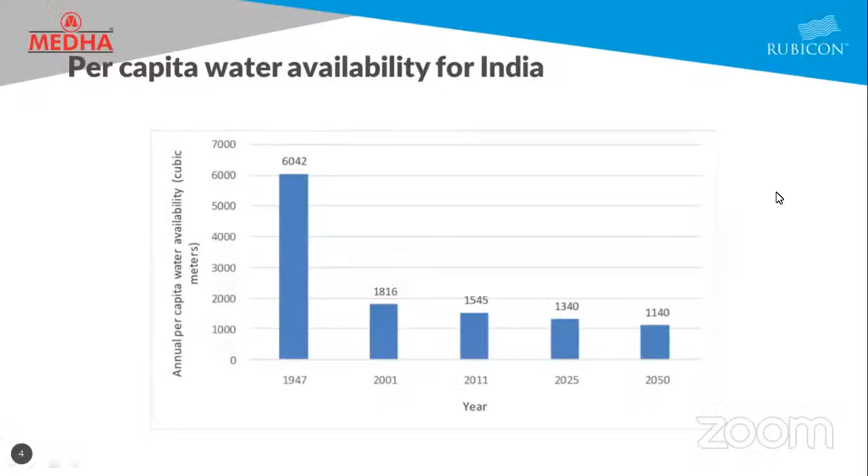By 2025, and at the same time, on the other side, the population is going up. Now, this is one of the major challenges.

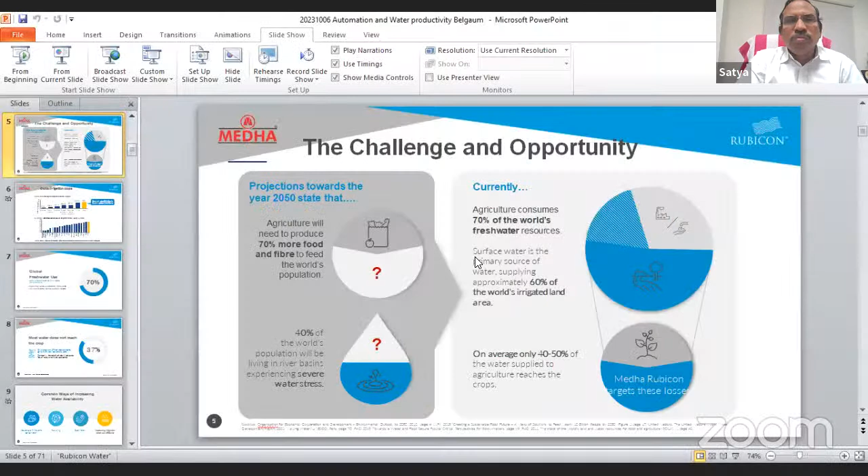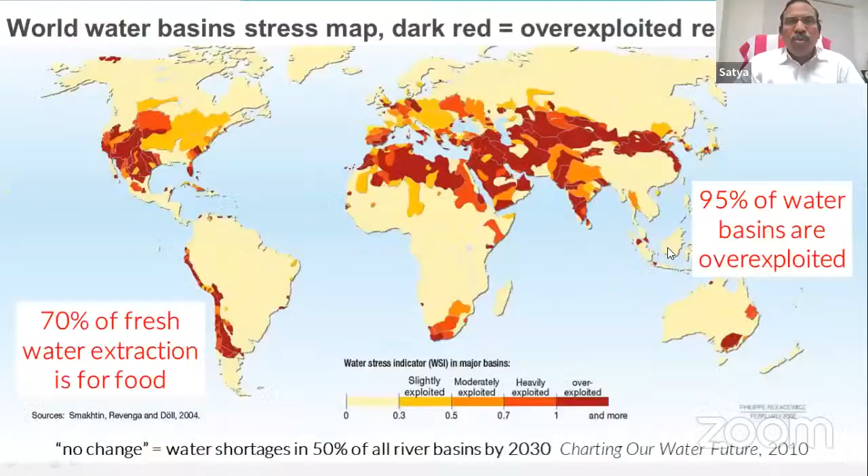Okay, now I got it. Are you able to see the screen? Yes, we are able to see it. Please continue. Yes, sir, please go ahead. Sorry, I hope you have seen the screen earlier. Yeah, this was over, you can move to the next slide. Yeah, further, yeah, this is it. Okay, fine.

Now, what I was explaining is that demand for food grains is almost 70% more required by 2050. Whereas another problem we have is that 70% of the world's fresh water is going to be used for irrigation, agriculture.

Now, out of that 70%, only 40% is the actual utilization. So how do we improve the utilization of water? That water efficiency improvement is the major tool available with us, and we can focus on this to overcome the future demand. This is the only solution available at this point of time.

Medha Rubicon joint venture is mainly focusing on canal automation to improve this particular 40 to 50% efficiency for the water utilization sector.

Now, if you see this screen, India is the largest agriculture bed. It's almost 62 million hectares, I would say, of agriculture space available for our country.

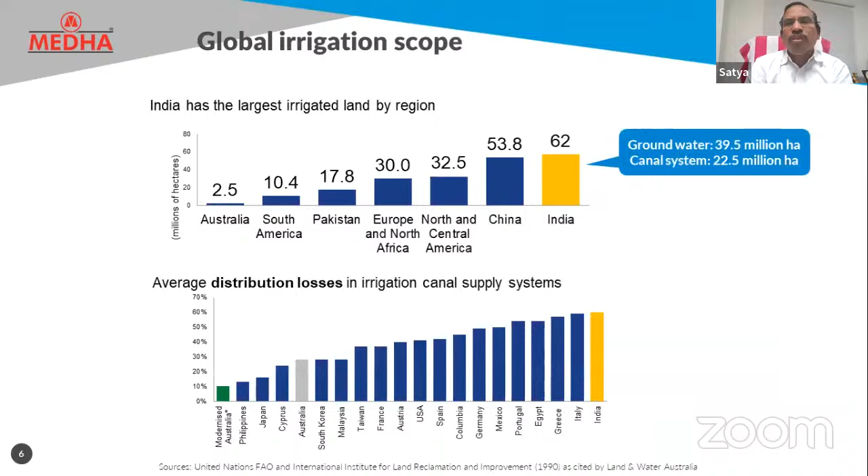Now, the fresh water, as I told you, 70% is going to be used for agriculture, and of that, only 37% water is used by real agriculture usage. The remaining 60+% is going to waste in today's environment of the irrigation sector, the agriculture sector.

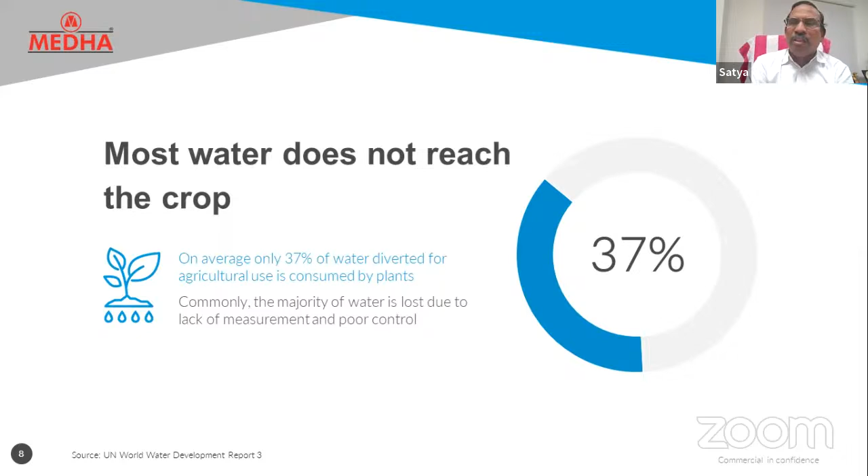Now, how do we improve this 37% to maybe 70%? Definitely, our agriculture sector will get a huge amount of water, which will directly increase sustainability, increase profitability, and solve all our future problems.

Now, for increasing water availability, there is only one improvement we can do in the last circle, that is improving the irrigation water use efficiency. That is the one we have in our hand today.

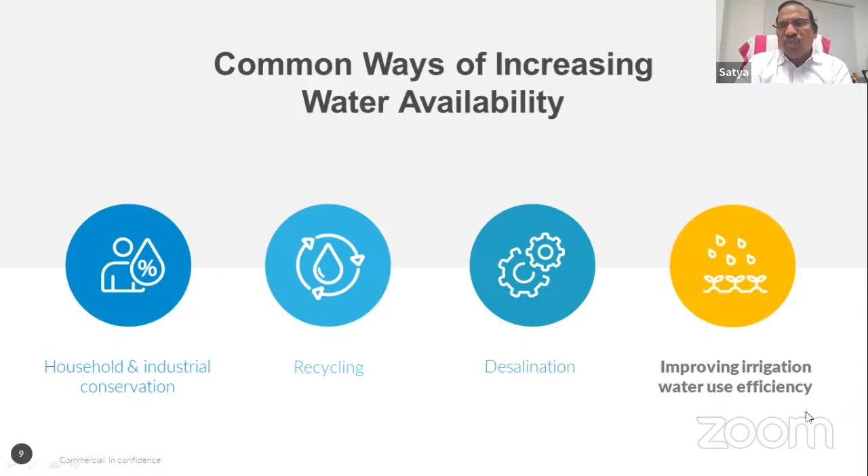The remaining options like desalination, recycling, and household/industrial conservation, are not as effective. But if you increase the efficiency, there will definitely be good effectiveness increase.

Then, if you look at the real losses, one is the leakages from the canal, seepages, unauthorized use, measurement error, leakages around farm outlets, and evaporation.

Evaporation is not in our control, leakages are well in our control, seepages can be in our control, and proper distribution is also one of the major objectives where we can improve water distribution efficiency much better than the present scenario.

We have already done this experiment in India, and we have shown very good results. That should definitely go nationwide now to improve the efficiency of water utilization.

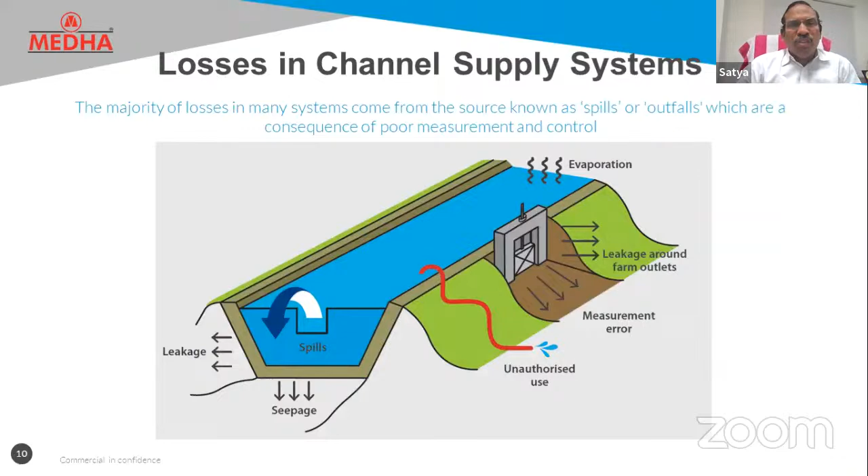Now, I'm talking mainly about canal automation, what it is. In the present scenario, distribution management, water distribution from the dam to the tail end, goes from manual to automated, and automated to remote monitoring, remote operation, and autonomous.

Now the solution we have provided today is autonomous control. No need for any manual intervention. Straight away, autonomous control can be implemented with our solution.

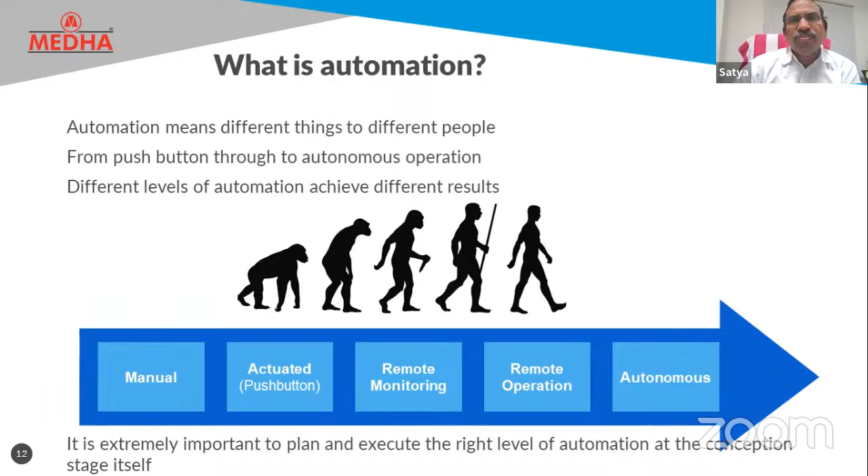Now these are all the different levels of autonomous control, from level 1 to level 5. If level 5 is achieved, it's really a wonder from the canal automation point of view.

And this canal automation will definitely give you a lot of data, a lot of picture of the water distribution and consumption of each and every farmer, each and every outlet. Based on that, a lot of improvements can be made. The data will provide a lot of insight.

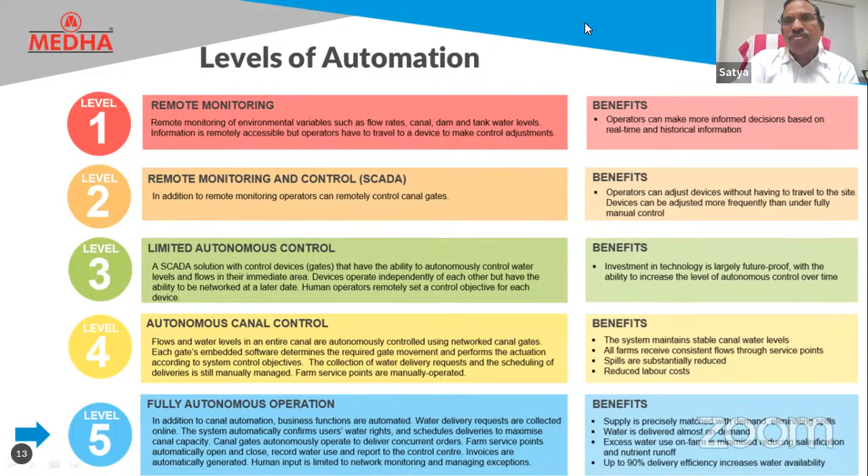The autonomous control should happen from the dam gate control to the farming land control. That means the DPO, whatever water is consumed from many outlets, the information will continuously pass on to each cross regulator in a real-time communication mode. Whatever amount of water is consumed at the tail end or the farming land, it will go to the next upstream level gate control.

In the upstream level also, the gate will automatically open to discharge that much water from upstream to downstream. That means the canal will always be maintained at the defined upstream level in the entire segment from the dam to the tail end.

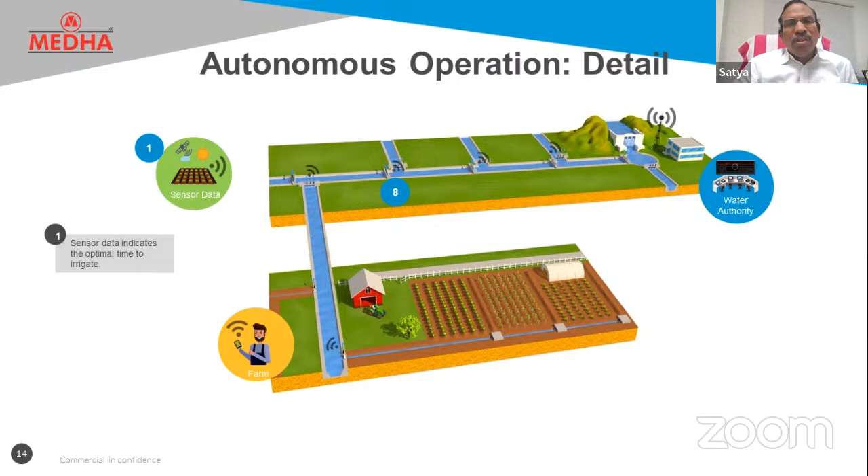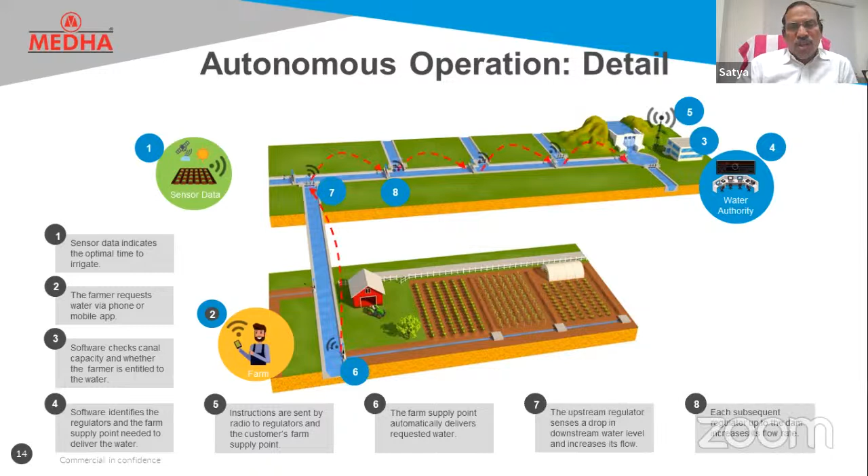That is the main advantage of the autonomous control, because all these controls work through a systematic communication network. There is a lot of computer software which handles this management and delivers the water from mainstream up to the farming point. Now that is the autonomous control.

Now, if you see this particular one, this is called a cross regulator or the outlet. These gates, like the upstream, you see one cross regulator, and this is one more branch outlet. Based on the control, both these gates will automatically, continuously, in communication mode, manage the water discharge in a systematic process.

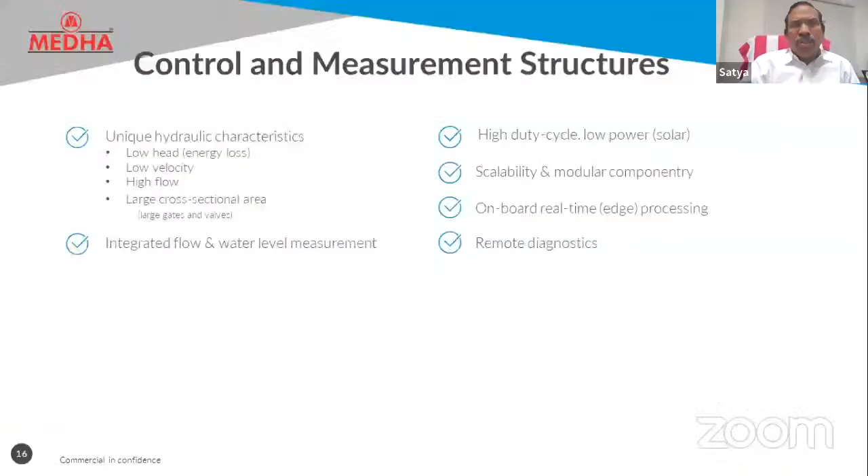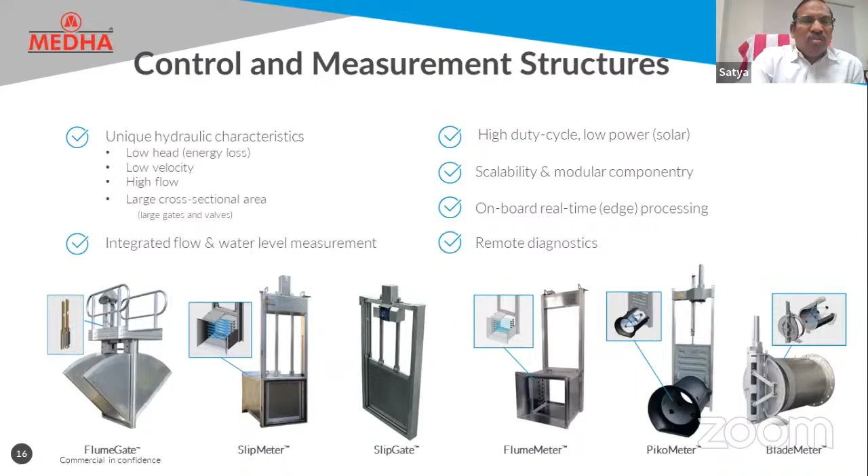Also, the flap, whatever you see on the black side, is like an aluminum alloy, almost the kind of material used for aircraft, which is lightweight. This operates up and down, and the entire mechanism of the motor is controlled with small power available from the solar panel and battery. The entire gate is operated with a 48-volt supply, generated from the solar panel.

Now, these are all the gates, and there is a special description on this. In the detailed presentation, I can explain each and every gate, the accuracy of the flow measurement, the accuracy of the level control, and the kind of materials used. But these are all gates integrated with the existing canal, whether lined or not. The gate mounting structure should be made properly to install these gates, and it will work.

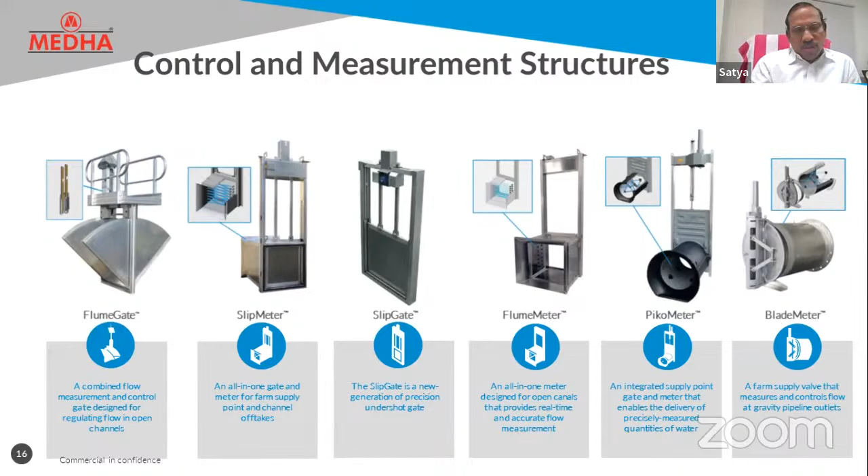Then the other one is the dedicated integrated communication infrastructure, because all these gates are going to be synchronized one after the other from the dam gate to the tail end gate. Now all these gates have to be in continuous communication. The communication network will be implemented as a dedicated network in the field area, because we are not going to depend on GSM or regular communication. This is RF communication, and we will not have any disturbance from other networks. This dedicated line is required, because if you don't know how the water is flowing, some places overflow, which is going to damage the canal and may flood sometimes. That's why this dedicated communication is required.

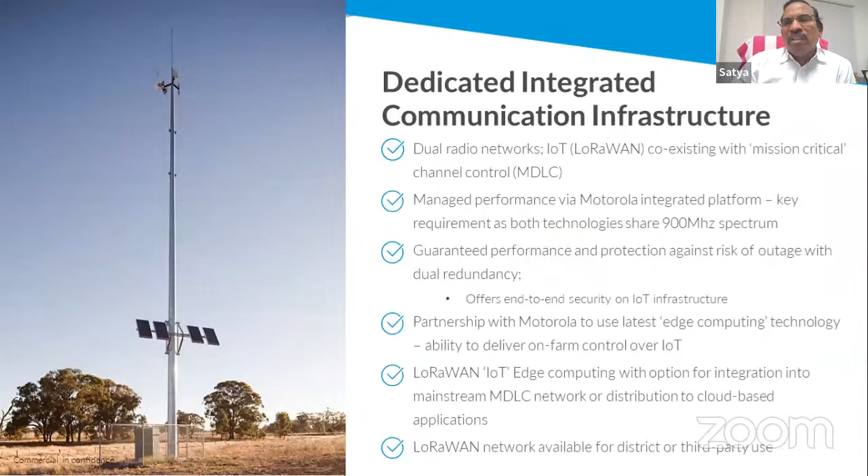This is the communication infrastructure. The communication tower also works with a solar panel. That means no place have we taken outside power. The entire system works with the solar panel.

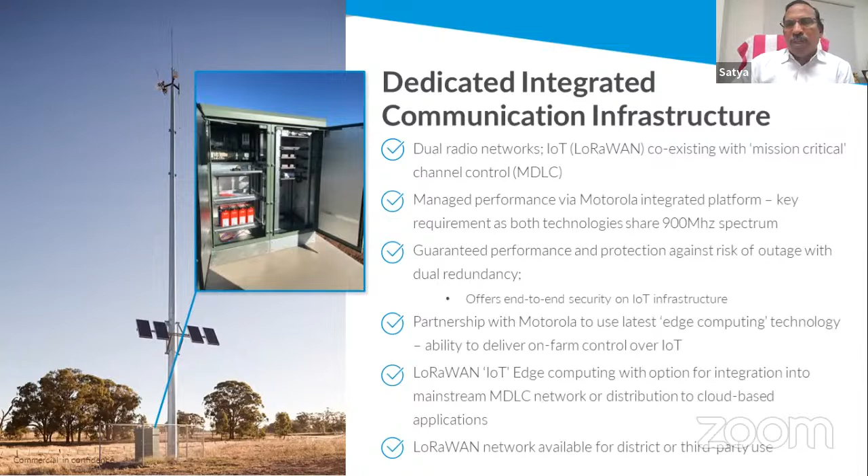Now, if you see here how the communication network will be: each outlet talks to the other. That is peer-to-peer communication, and at the same time point-to-multipoint communication, and point-to-point communication. This communication has been designed in such a way to meet the entire irrigation requirement.

It is established, one is in Kaleswaram and one is in Narayanpur left bank canal. In Narayanpur left bank canal, we have implemented almost 15 towers across the entire segment of 1,200 kilometers range.

Now, from the information point of view, irrigation management software is required. In this software, the irrigation schedule, advisory, and water order form a portal. That means in future, suppose a farm of 100 acres or someone wants water at a certain time and a certain amount in liters, they can feed that from the mobile phone to a server. Automatically, at the particular time the gate will get open and a particular amount of water will be discharged to the particular station. That level of integration is available in this entire network.

Then the network visualization, network topology modeling, distribution planning, and SCADA connect, remote connect. You can continuously see the data, what is happening, how the distribution is happening, and how automated delivery is happening. Everything you can visualize from this entire picture. That is called management software.

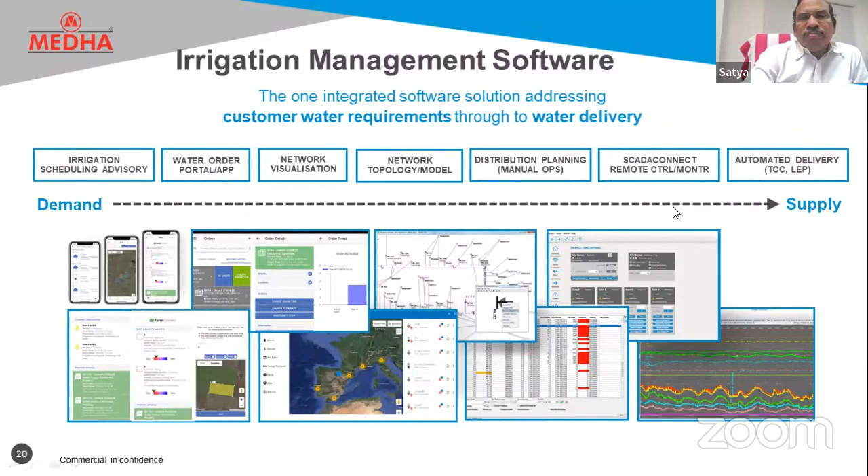Now, if you see this kind of display, you can see the entire picture of what is happening, how the water dynamics are changing, what time the water was delivered, how the levels are increasing, and this particular data shows the entire water dynamics. That means we can maintain the pool. CR to CR is one pool, and in between there are distributaries. How much amount of water goes from upstream CR to downstream CR, and how much has gone to the distributary, and how we can always maintain full supply level - that entire picture can be visualized, and you can program and use that.

This particular site is an Australia site and China. They have implemented this canal automation very extensively, and they have done an excellent job as far as water utilization is concerned.

Now, in addition to water rate distribution and other things, there is another unknown factor - rainfall. Suppose you maintain a water level at full supply level, and there is a sudden rainfall in that particular area - then what will happen? The water supply level will increase, full supply level will increase in the canal. During that time, based on the rainfall data and the rise in water level data, automatically the gate will get open and it will try to protect the canal, so it should not overflow or cause floods. Sometimes automatically the escape gate will be opened to maintain the FSL level always in the safe zone.

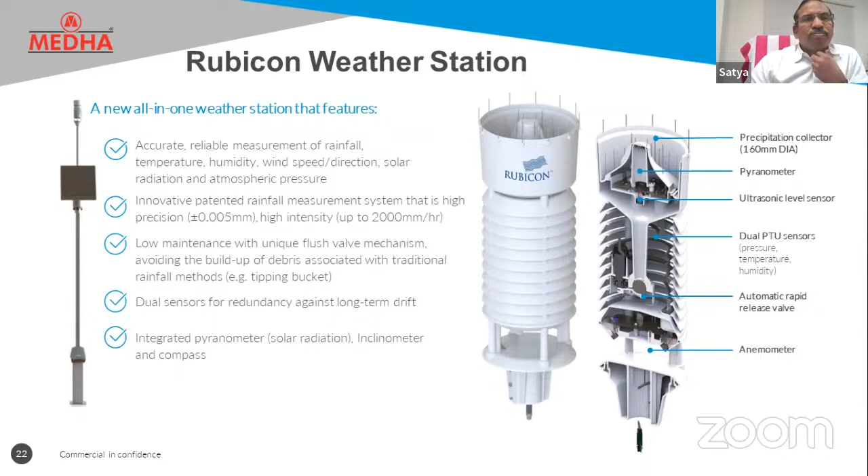Now, successful canal automation projects are done in India. We have done many projects there. I will tell you one by one.

This is the project in Karnataka, and I would say in 2019, I think we got the order from Karnataka for the Narayanpur left bank canal.

This Narayanpur left bank canal is almost like a 1,250 kilometer canal with 4 lakh hectares of agricultural land. They used to have a lot of problems earlier, and the water efficiency was almost like 30 to 35%. We have implemented this, and we showed results in 2022 — I think the first full season — and 2023 is going on.

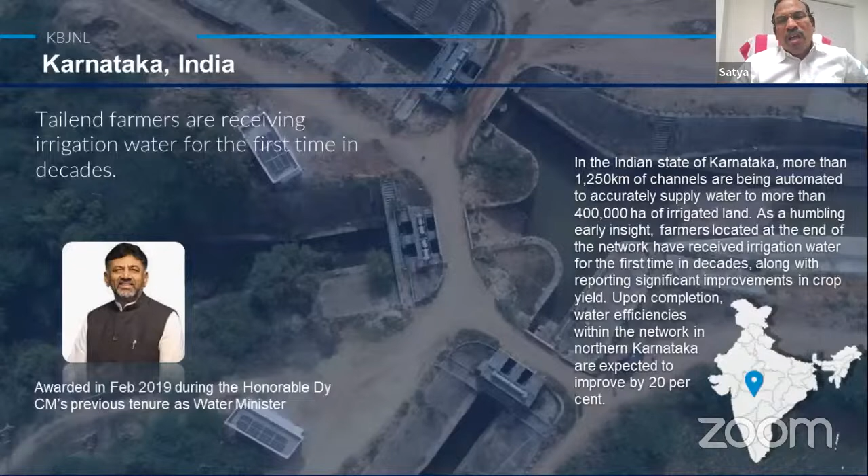In 2021 also we have done some level of project completion. Now, last year's data always shows a 20% improvement in water usage efficiency. The amount of water we used to take earlier from the dam, and the amount we are taking now — there's an improvement of 20% already demonstrated for the country with canal automation.

Now, in this particular canal automation, the main objectives are operational efficiency improvement and transparent water supply. Now today, I'll tell you about one of the recent things from the last one week, what we are doing.

There is a shortfall of water from the Narayanpur dam, and there is a lot of pressure from the farmers. Now, in the canal SCADA center, many MLAs and farmers are coming, and they are really seeing how much water is available, how much distribution is happening, how much we are able to deliver at each outlet — they are able to see the entire picture in my SCADA center in Narayanpur.

That means there is a lot of conflict between village to village and fighting between farmer to farmer — you are taking more water, I am taking less water, I am not getting water. All that information is clearly visible, and the Narayanpur people are able to manage the crisis situation because the water supply information is available, no problem.

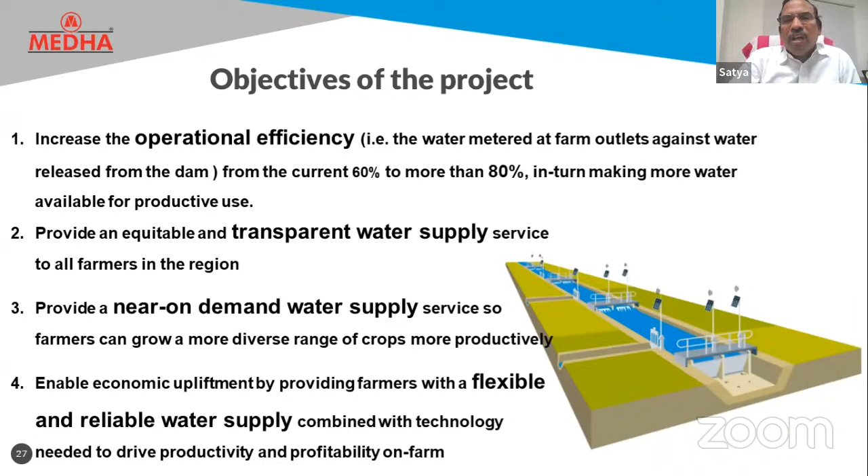If the water supply information is not available, then only the problems are going to start. The visualization picture is really giving a lot of insight to the people there.

We have created automated structures like some new cross regulators we have designed. We have done the hydraulic analysis of the entire canal, and identified some locations where we need to add some cross regulators, and those cross regulators have to be automated. Then only is it possible to get good efficiency.

Based on that, we have supplied almost 144 new gates, and we have constructed more than 45 new cross regulator sites, and we have improved the water availability efficiency.

All the old cross regulators — these are all radial gates. All these radial gates, which were not in operation earlier, we have refurbished and automated. We have not installed new gates.

That means all the automated radial gates have been refabricated — reconditioned — and we have installed automated motor and actuation mechanisms to improve the control of those existing old gates.

And we have installed micro weather stations — 60 weather stations — and 15 wireless radio towers in the entire network.

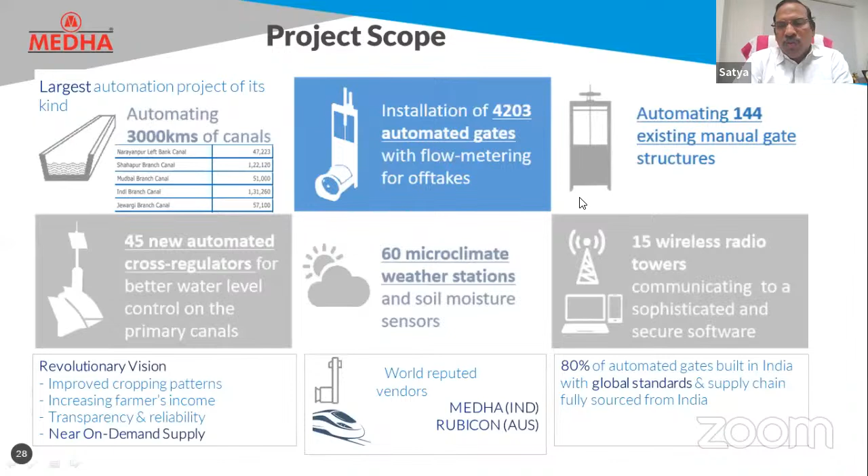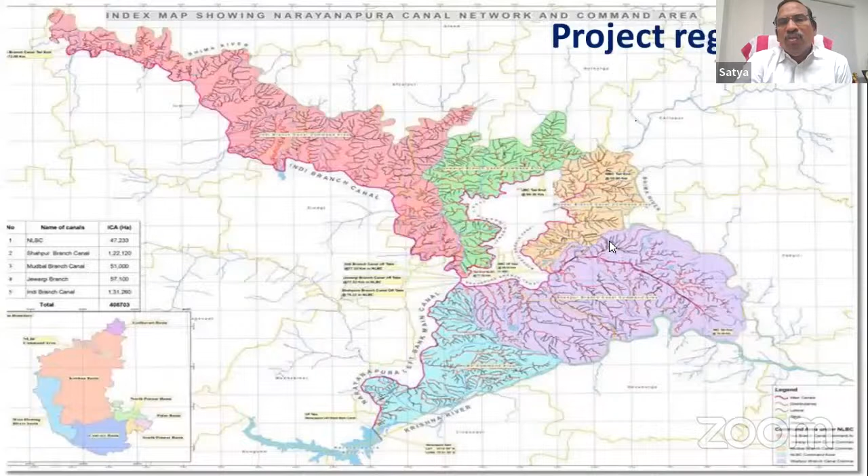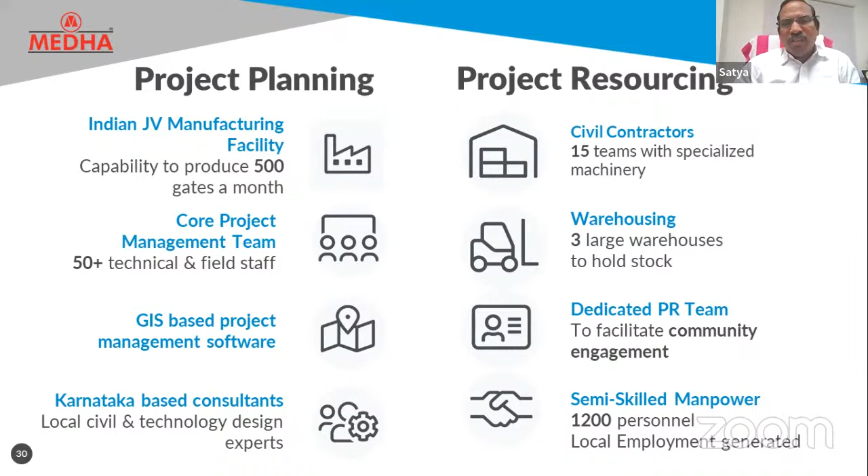We have explained to them, brought them to the training center, and given sufficient training. We made them understand, and a lot of activity has been done, and a lot of people are working in the project right now.

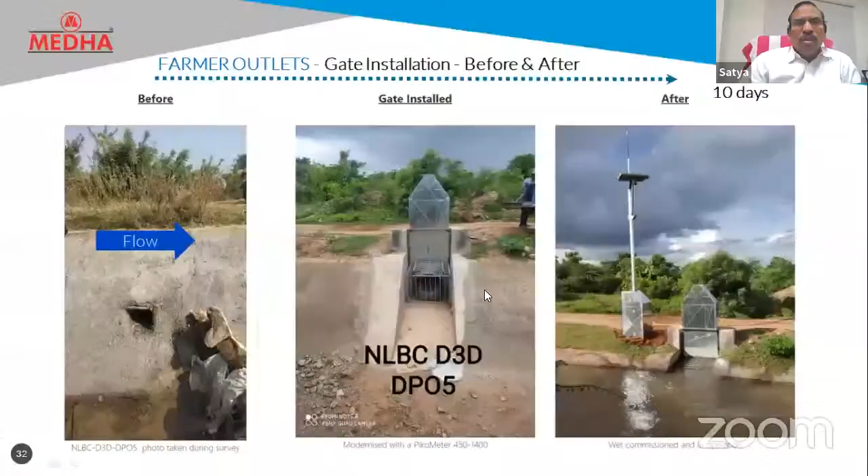If you see this one, the earlier condition of this outlet is the leftmost picture. Only a simple outlet without any control. And farmers used to put a bund because they need to get water. Like this, the entire canal has many challenges. Now we have removed all these bunds.

We have changed this particular outlet condition to this level, and it's fully operational today and full of water. We have always maintained full supply level water.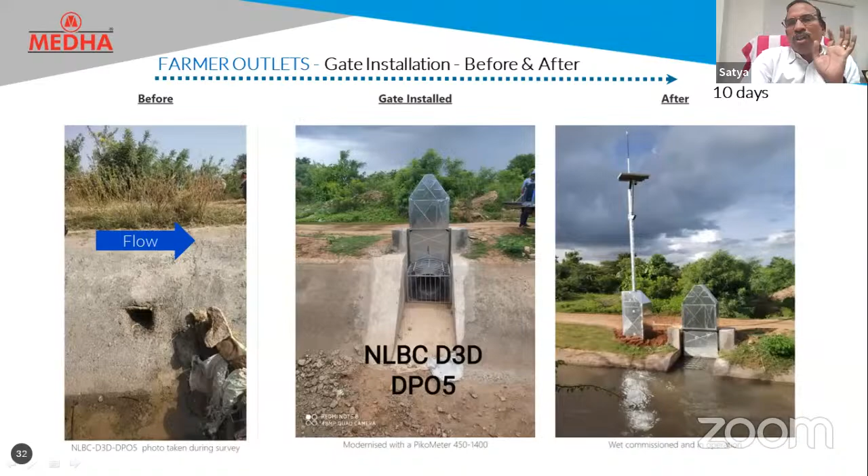Now you see all the SPC, MBC canal, JBC canal, NLBC canal - a number of pictures here. All the sites, every outlet, we have done the work, and we have implemented the automated gates in each and every outlet.

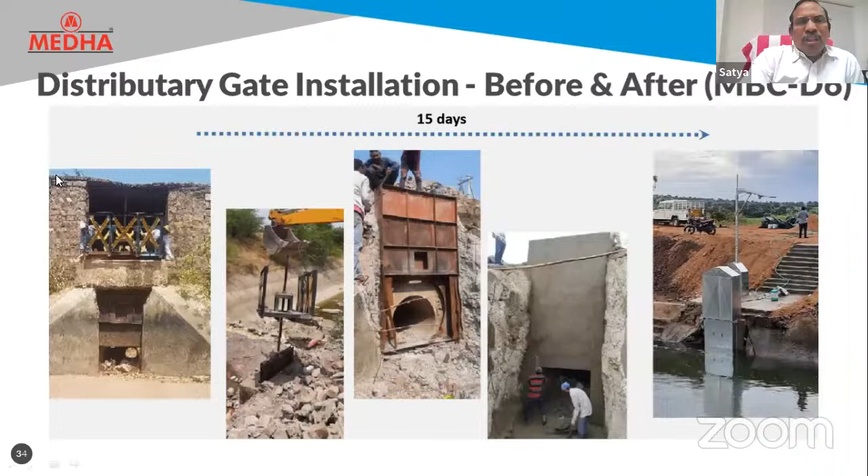Now this was one of the distributories. The major distributory used to be like this, with no gate operation, something like this. Then we have removed everything. We reconstructed the wall because we needed a very vertical and systematic flow, otherwise my gate will not move up and down properly. After that, we installed it, and it is running smooth, full of water.

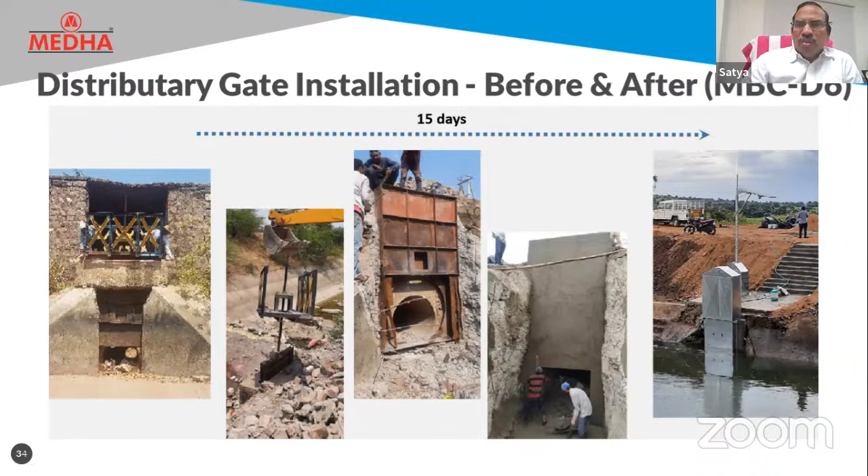Today's scenario: MBC D6 distributory. Now this is the MBC, the major distributaries of MBC, the D25 and D26. Now the old gates were like this, metal gates.

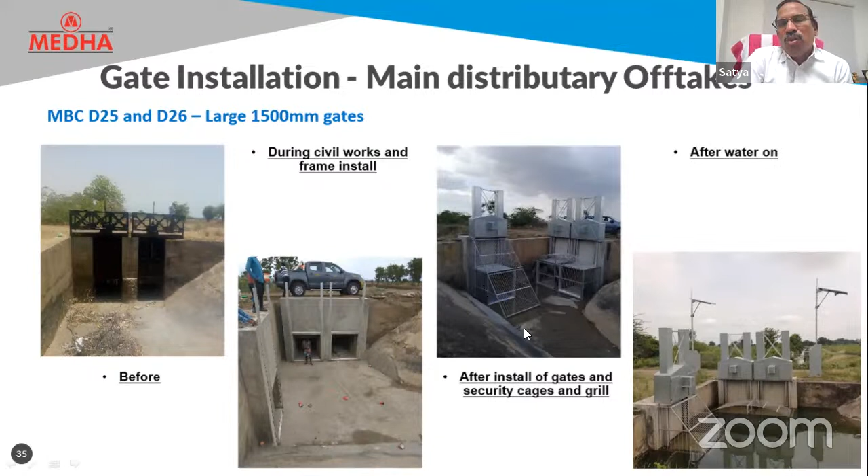We have reconstructed the civil part for the metal gate, whatever is required for our gate, and we have installed the gate. This gate is each 1500 mm, 1.5 meter gate, with a trash screen. The trash screen is required, otherwise the mouth to the gate outlet will get disturbed. That's why we put the trash screen, and we are able to maintain the flow of water here.

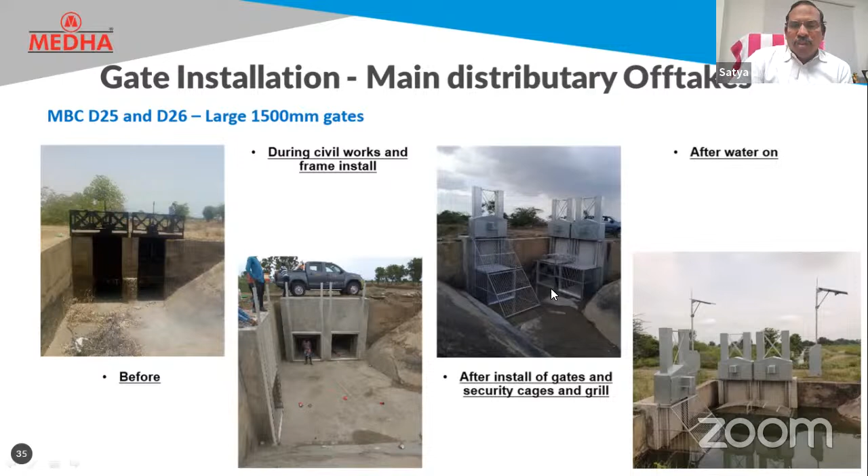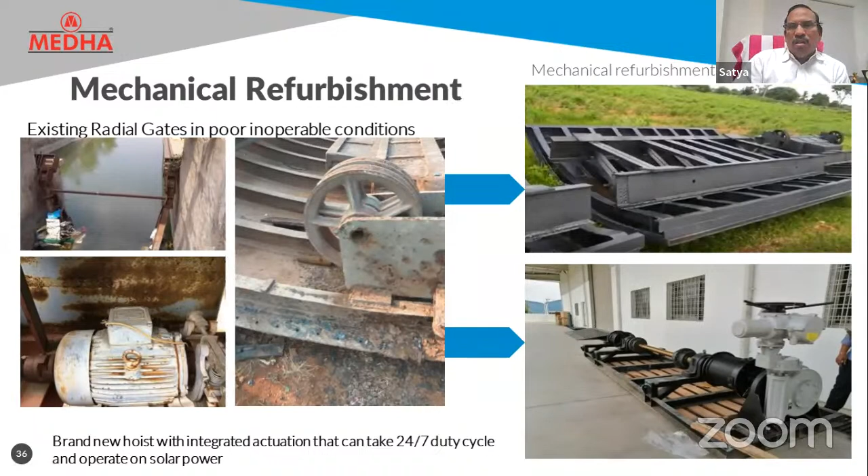These are the cross regulators which were not in operational condition. We have refurbished all the gates and installed the actuation system. Here also you see the right bottom picture, there is a motor with an actuator. With a solar panel, we are able to operate this hoist, this control. All the cross regulators with a radial gate we have refurbished like this.

Now this is in full operation in the escape gates also. Now these gates - I think for India this looks like a new gate - and this particular gate is not a vertical shot, it is an overshot gate.

And these gates rotate like this to allow the water to flow. It will rotate like this. Now earlier your vertical gate and horizontal gate, it will come up like this, whereas this gate rotates like this.

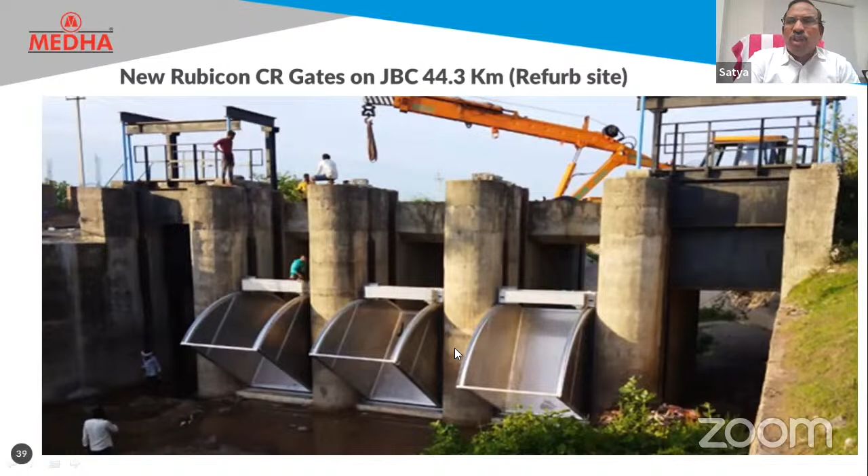Now what we have done is calculate the flow. On the other side, two outlets we have closed, and only with these three outlets we are able to get the flow requirement and discharge requirement. We have installed the flow sensor at the entry path of each canal to measure the amount of water inflow and how that inflow water is distributed to each and every outlet. That's why we've installed this open canal flow sensor, flow meters.

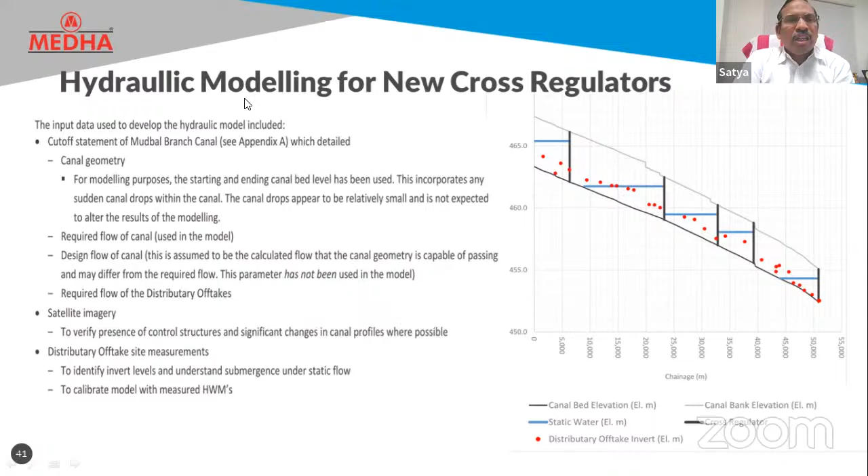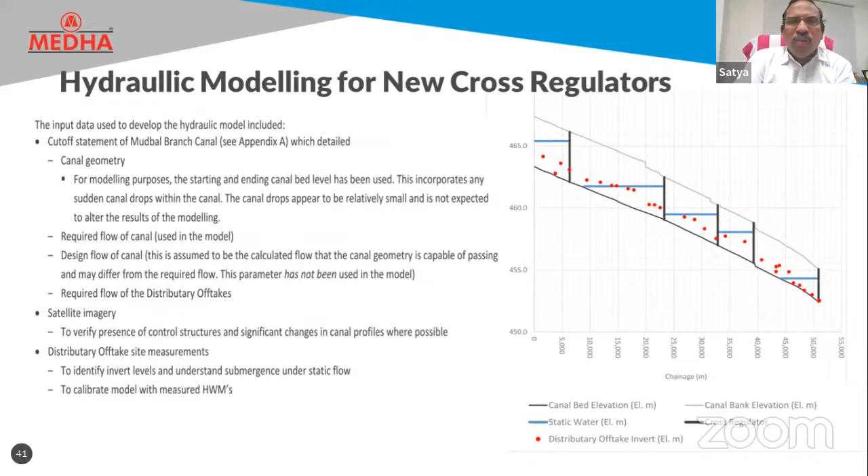Here we have done the hydraulic modeling of the canal, and we have suggested where all additional cross regulators are required to get water for some of the distributaries. After this hydraulic modeling, we have newly constructed cross regulators and implemented them in the field in the NLBC.

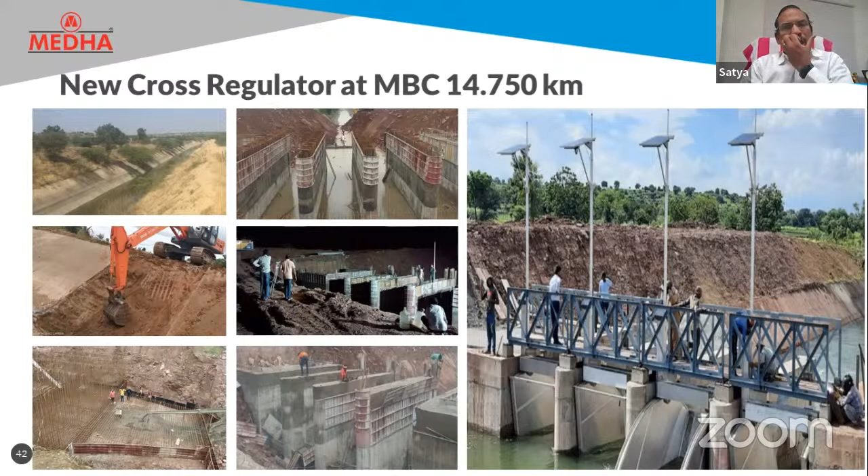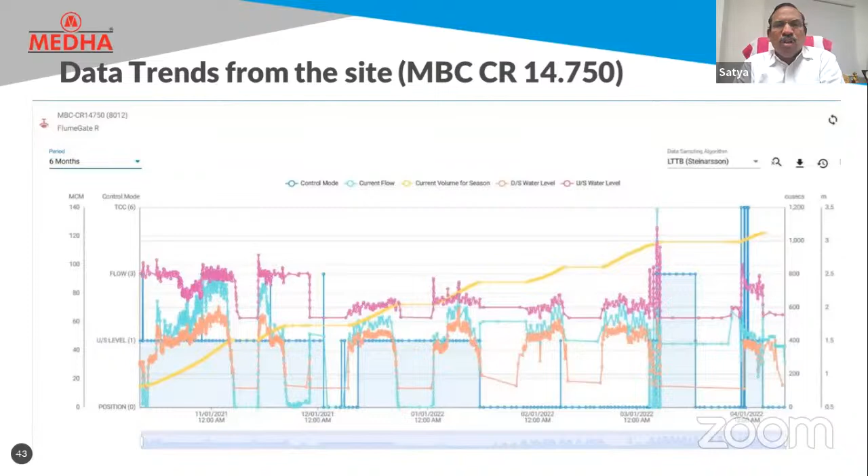Now this is the dynamics on the same CR, how the water flow is going to happen, how the level is maintained, upstream, downstream, and the flow.

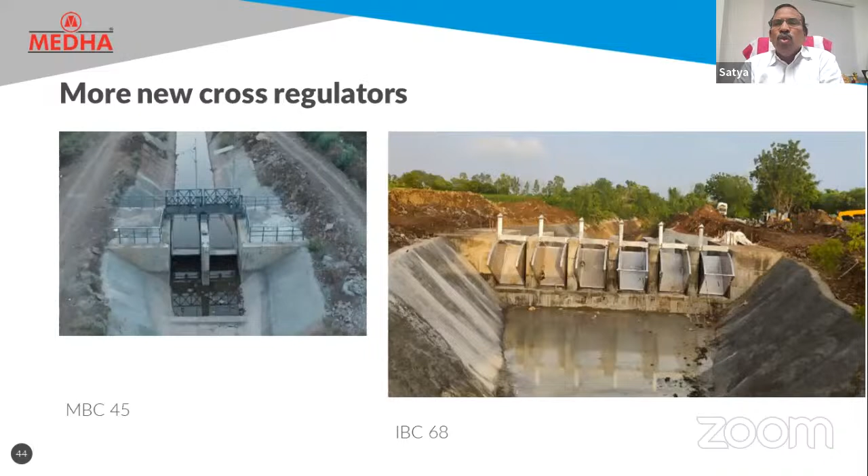Now this is one more CR we have constructed in IBC. There's a 6 gate CR we have constructed, and we are able to maintain the water in full supply level in the entire network, entire canal.

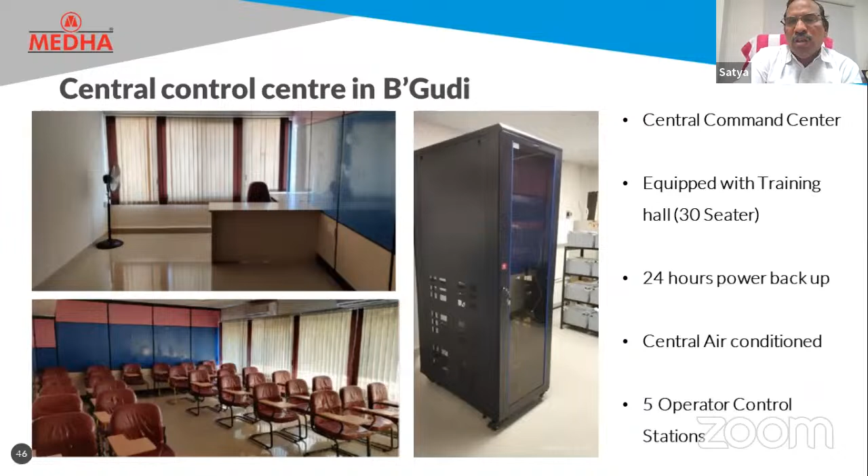And this is the SCADA center we have implemented in Bhimrayangudi, which is the central location of this entire canal network. In this SCADA center, we have a training center to train engineers and farmers. This is the server located with a battery backup and everything, with redundancy, working 24/7, 365 days continuously with all the gates and the communication network.

Now this is the real-time training center we have implemented across all segments, including the farmers. We bring them to the SCADA center and explain how the gate works, what kind of challenges exist, and how to improve water efficiency. Some of the people have given feedback.

We have a toll-free number. Some of the people have replied saying that we got more water, please close the door. The people used to give us that kind of feedback.

Earlier, there's one more example I will tell you. Earlier, let's say a 600mm or 900mm outlet, they used to get a lot of water because the gates were not in operation. But after we implemented the system, we have maintained the head at full supply level. With openings of 100 or 150mm, sometimes we are able to meet the supply requirement of that entire outlet, the entire branch canal. That means earlier, imagine a 600mm outlet without a gate, how much water used to flow.

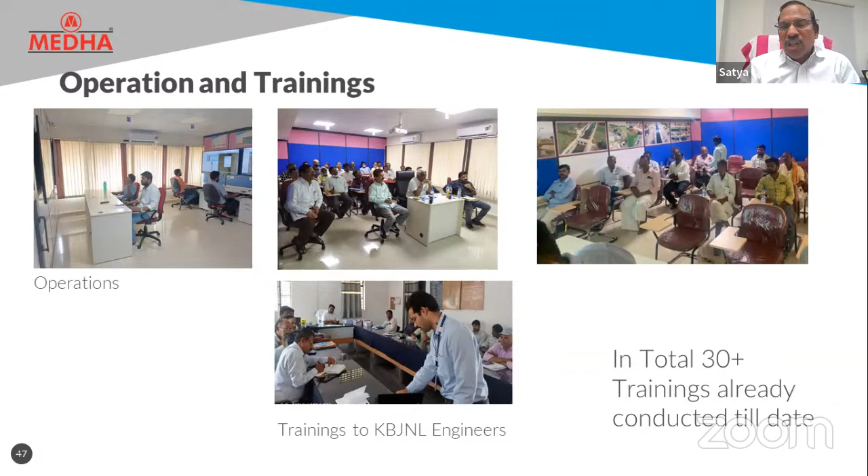Now, after installation of the gate, and with the amount of flow required, we are able to meet the requirement within a 100 or 150mm opening, even though it's a 900mm gate or 1.5 meter gate - we can meet it within a 150, 200, 250mm opening of the gate. That's why you can imagine how much water used to be wasted earlier.

Now, this is the early benefits we are getting, the amount of supply benefits and other things. Also, this canal might have been constructed almost 15, 20 years back, and for the last 20 years, they never got any water.

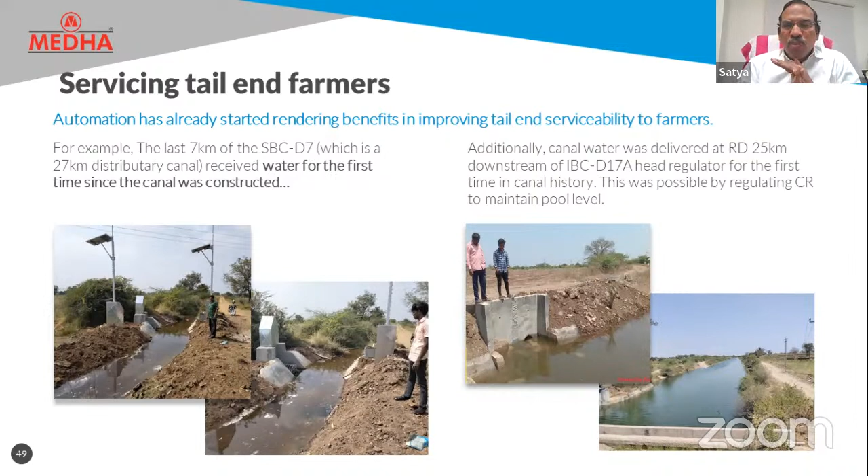All the distributors and outlets, small distributors, up to the tail end, we are able to maintain the water. That is the immediate benefit we have achieved by implementing canal automation. The only thing is we are able to maintain the head. Second, we are able to avoid unwanted draining of water from the canal, unwanted distribution. Then automatically water has met all the requirements.

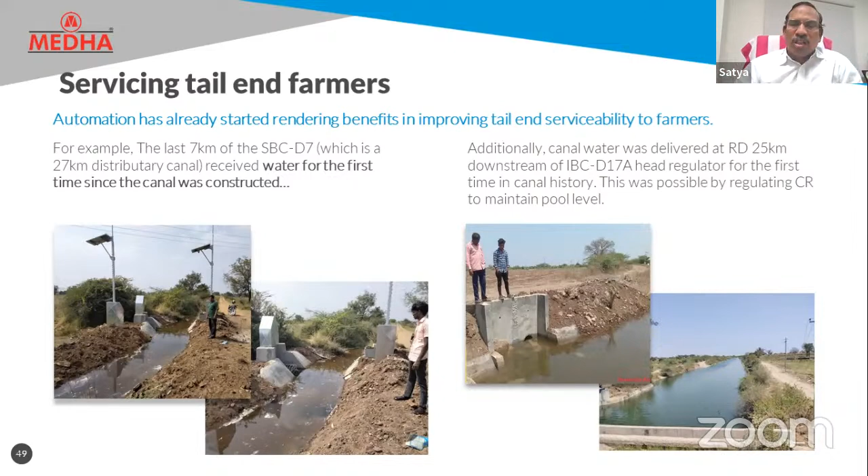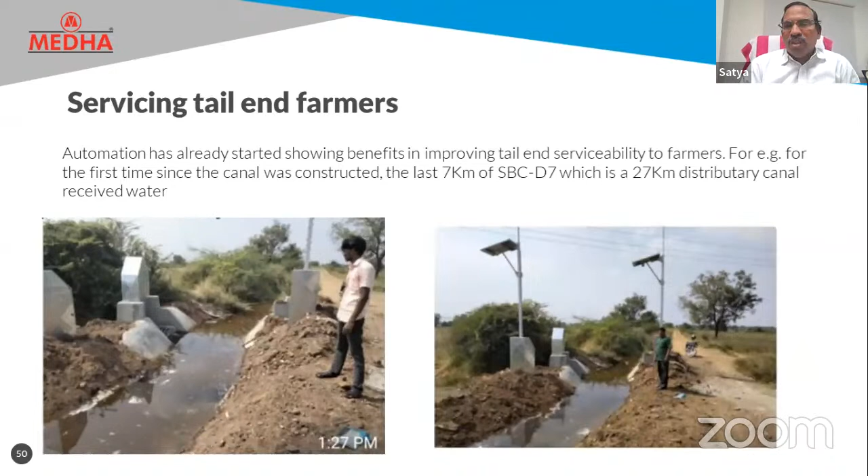Now these are all the serving outlets in the SBC canal. At the 27 kilometer distributor endpoint, people are getting water. You can't imagine - some villages have celebrated the day we released the water, because their farmers used to depend on different water sources. Now they really felt very happy.

One of the section superintendent engineers took feedback from the farmers and got excellent feedback from them. Farmers now cooperate and coordinate with the SCADA center, and they are getting a lot of support.

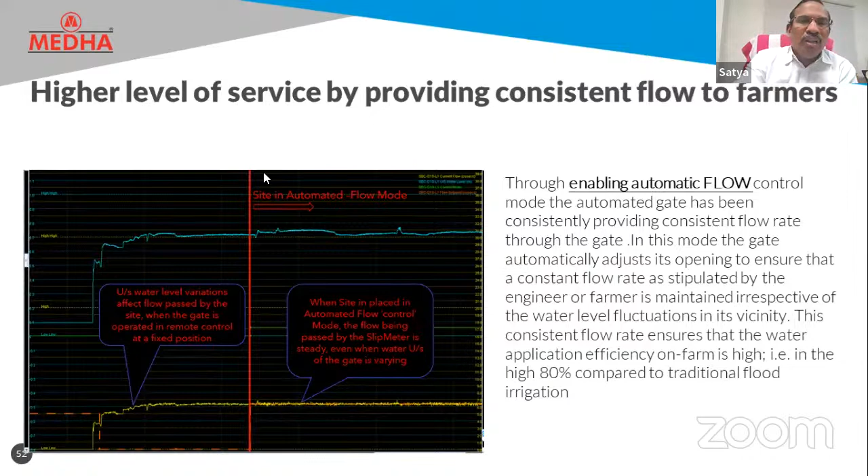Now, the high level of service by providing consistent flow to the farmers - we are getting a very good flow here, always maintained at full supply level in the canal.

Now, this is the amount of inputs we will get. We can monitor continuously - there is a control engineer who sits and monitors the entire canal network across different branches we have done.

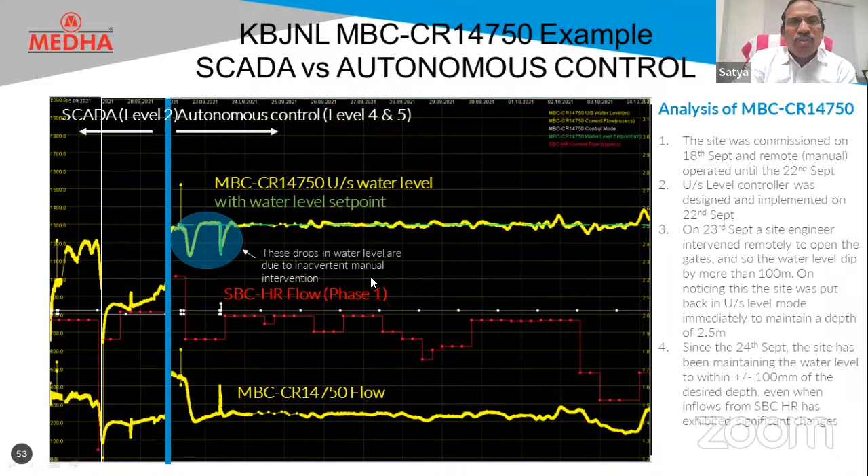Now, if you see this, and how that particular operation works - on the other side, some people are taking water with a bund and other things. Here you see that there is no bund. Earlier they used to use the bund. After we built confidence with the farmer, we removed the bund here. That level of support we are getting - earlier, they never used to remove this bund after the distributory. Now you see there is no bund, we have removed it.

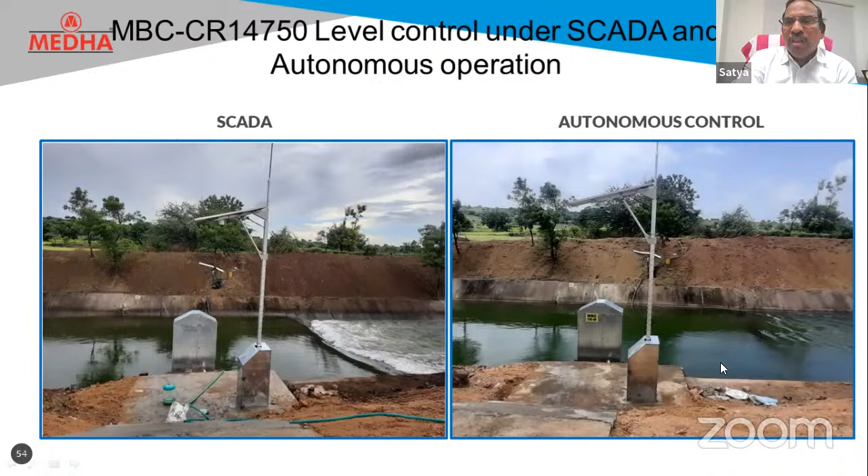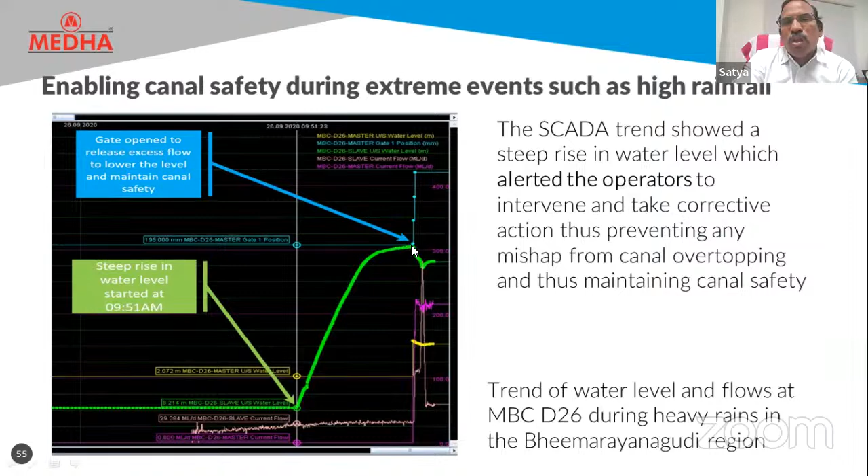Canal safety is also one of the important aspects. We get an alarm for extreme events such as high rainfall, and then automatically we operate escape outlets to reduce the flow and canal water level, and we are able to control it automatically.

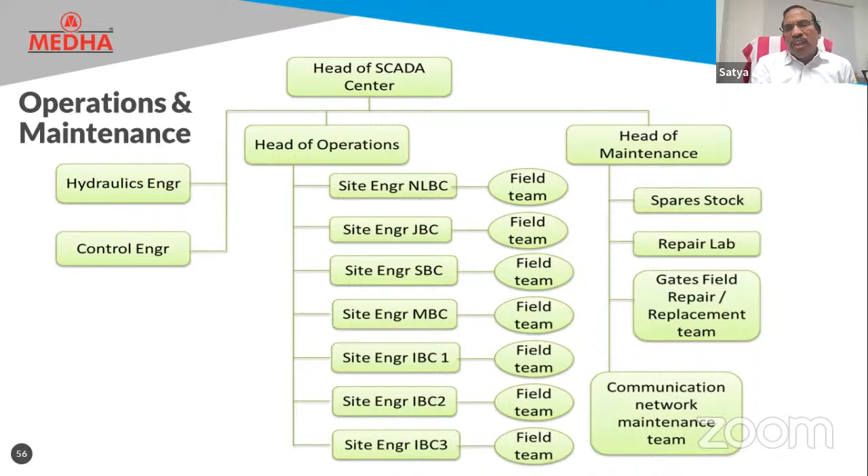This is the way the SCADA center works, and the SCADA center is a 24/7 operation. We are able to monitor all the canals and outlets and control them. If it is autonomous, the system itself will control, and sometimes there is supervisory control, with a field support engineer working with the field team.

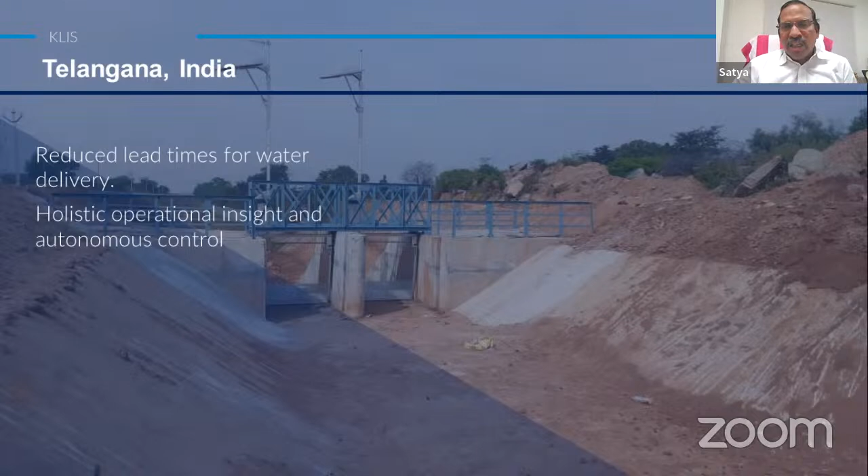This is another project we implemented in Telangana, in Kaleswaram, Siddipet, at Ranganayaka Sagar, on the right bank. The government gave us the option to implement this as a pilot project, and we installed around 23 gates in this segment. We installed a server in the Siddipet irrigation SE office, and from there they control all the gates.

This is the main dam here. From here water is going, and we have implemented up to this level. This is the main outlet, and all these green colored points are our gates. We have implemented this serving almost 45,000 acres, automated through the RD3 distributary network, the LMC RD3 distributary.

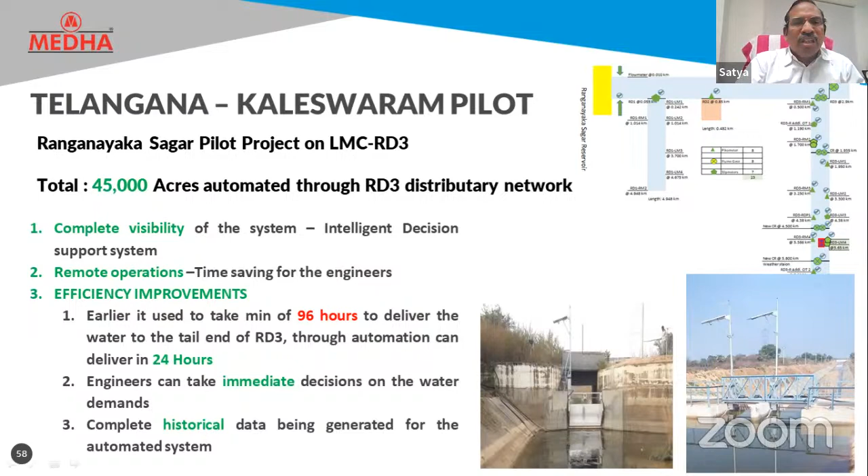One important point here: after implementation, earlier whenever they released water from the main dam reservoir, it took almost 96 hours to reach the tail end. Now today we are able to show the tail end water in 24 hours. That is the beauty of the automation, meaning we maintain all the outlets properly and operate systematically to reach the water to the tail end, so the irrigation engineers can immediately take decisions on water demands.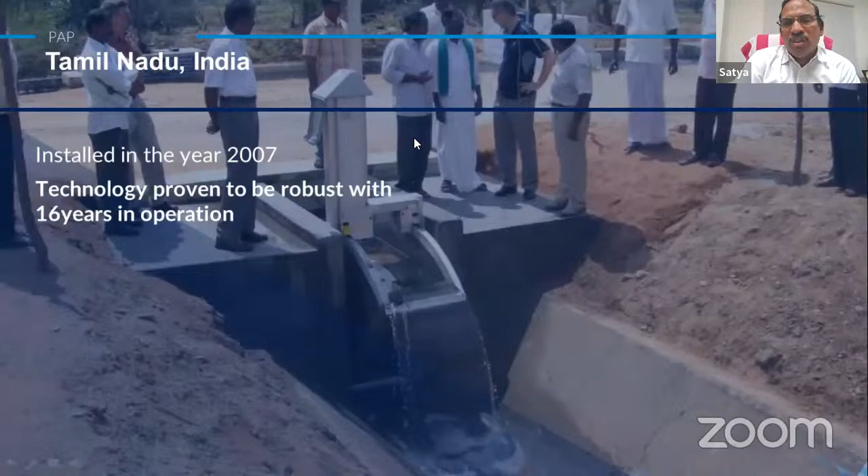This is the Parambikulam-Aliyar project. They implemented it in 2007, and 16 kilometers of the stretch was operated with canal automation.

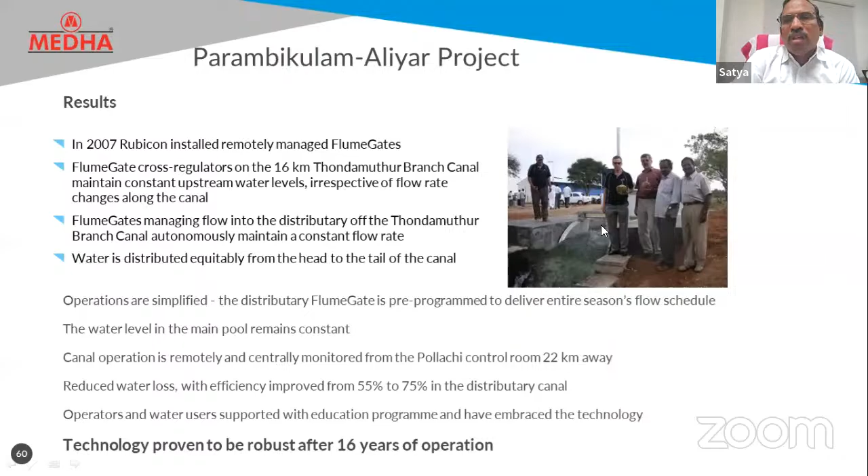This is another project, BPLIS in Karnataka. This is a pipeline water distribution network, also connected with a SCADA center. This factory is the Hyderabad factory, and this is the BPLIS material photo.

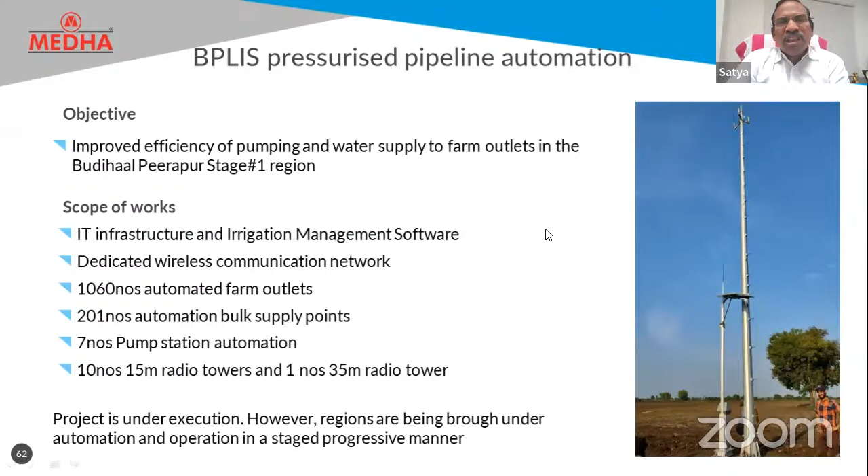For BPLIS we also implemented a very small communication network. This is not a 35 meter tower, what we implemented is a 15 meter tower, because the coverage demand is only that much. This is the entire communication network, and all the outlets of the pipeline are connected and controlled through this network.

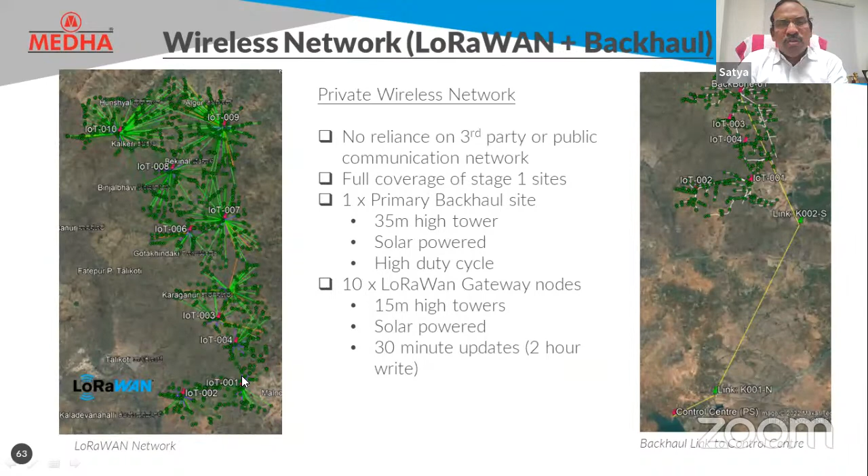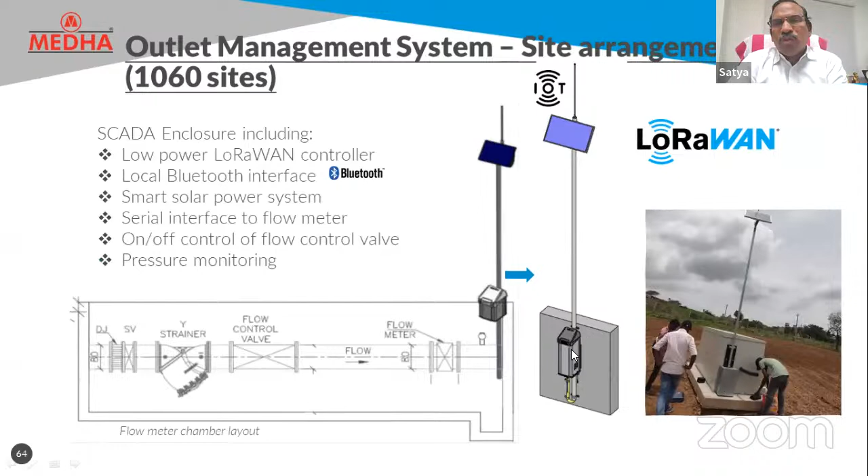Now, the outlet management system: for every outlet there is a management system that takes care of it. We supplied the entire hardware for that particular BPLIS project. This is the pipeline connection with pump station control, which we are able to control with our SCADA center.

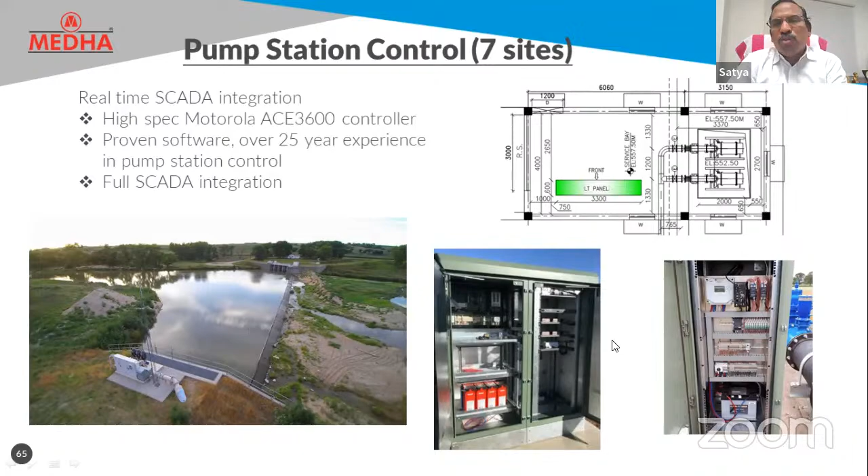This is the Rubicon, Medha Rubicon factory in Hyderabad, Nacharam, in the Mallapur area. All 4,200 gates required for the Narayanpur left bank canal are being made here, and we are in the final stage of getting the order for the Narayanpur right bank canal also. For Kaleswaram too, everything is installed or manufactured in Hyderabad.

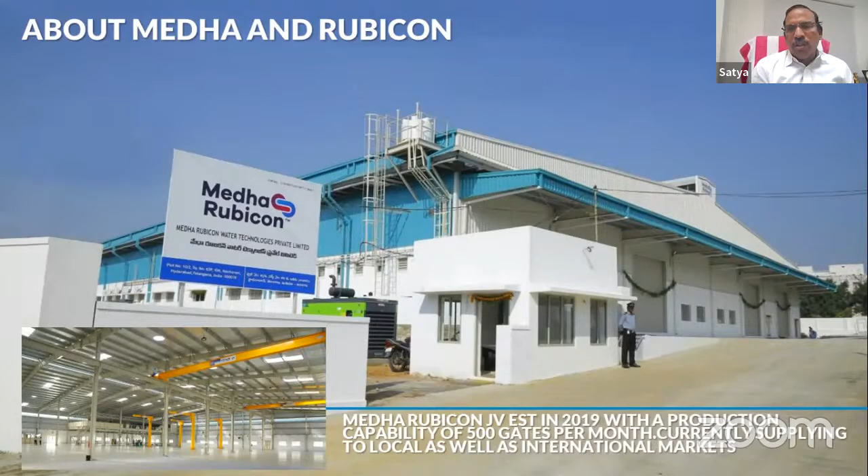Now, this is Rubicon. Our history with Rubicon is like this: worldwide they have supplied canal automation with almost 35,000 gates. Thousands of kilometers of canal have been automated, 70,000 functional points are already in use, and they have almost 218 patents.

Their product solutions are implemented in 17 countries, more than 2 billion data points have been processed, and 25 lakh hectares of irrigated land are managed with Rubicon technology.

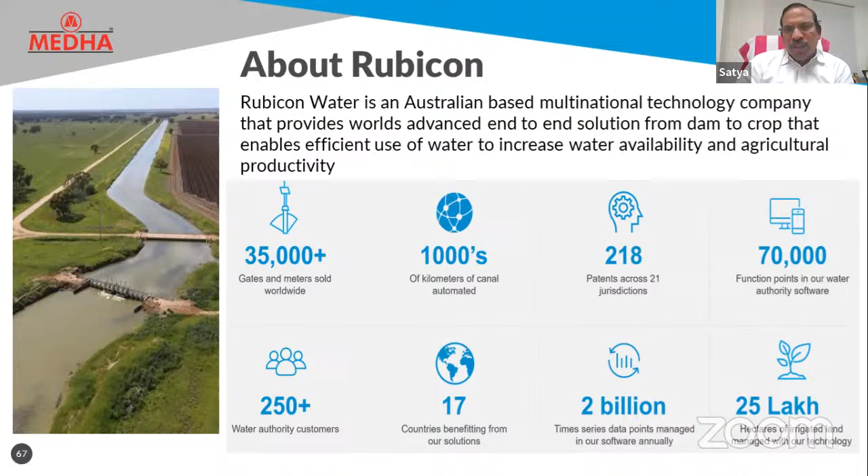Rubicon is a global company, and we noticed the particular challenges and advantages of this. Medha worked with Rubicon for Indian operations, and we took responsibility and implemented this project in India, bringing their technologies while automating the entire management and manufacturing in India.

And about Medha, I think people are also not aware of Medha. By looking at this picture, you can understand we are not a civil company, not a canal automation company. We are basically a railway company. If you look in India, more than 60% of the trains run with our locomotives.

We design and manufacture locomotive control and power systems. We supply to railways and they manufacture the train, including the entire electronics, control system, and motors required for the locomotives. Whatever important product in India we are seeing today is the Vande Bharat, which is designed 100% by Medha.

We have an R&D center in Cherlapalli, with more than 500 engineers working continuously on research and development. This is almost a 40-year-old company, started in a 10 by 10 room size. Today we are 3,200 plus people, and we are the largest company in the railway segment.

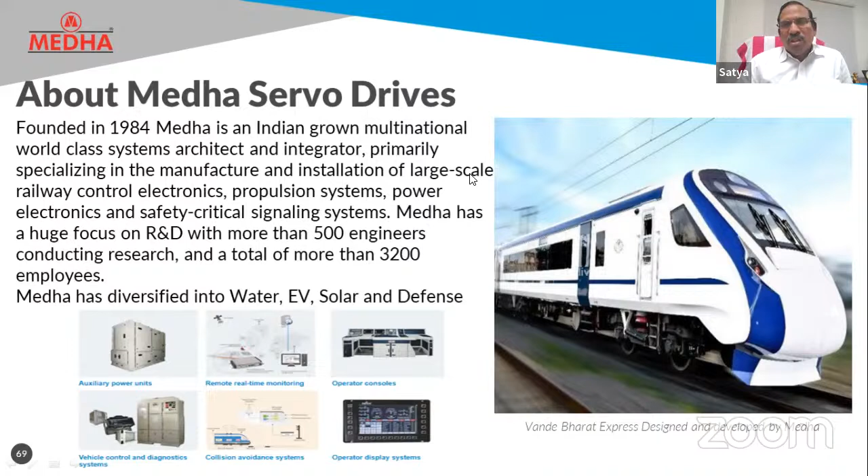This company is not just in India, not just in Hyderabad — we are globally present today. It's an Indian-originated MNC, not one that came from another country to India. We are the people who have built the technology in other countries like Italy, Spain, Brazil, New York, and Texas, and now we are supplying to other countries also.

This is about Medha. Today, Medha's turnover is something like 2,500 crores, all with our own technology, and we have a very good presence in the technology area. Because of this, we brought canal automation technology into India with the support from Rubicon. This is what about canal automation.

And I just wanted to take your feedback. If there are any questions or I need to show any slide again, I can go back.